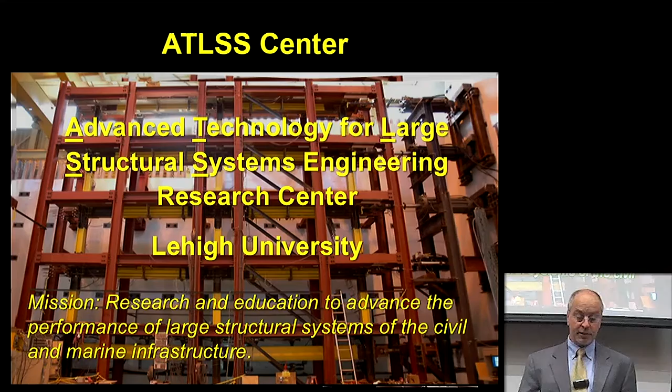One of our main features is our laboratory, similar in size to the Newmarket laboratory here, probably a little bit smaller. It's been there for about 30 years, and we have a lot of equipment and a very talented staff. What makes it special, I think, is our ability to do lots of large-scale tests.

For example, this right here is about half the width of the Bronx-Whitestone Bridge in New York City, about half the width of the actual bridge, in our laboratory at full scale. So that's the kind of thing we typically pride ourselves on.

Here's a summary or introduction of the talk. I think there's quite a bit of experience and knowledge about self-centering systems here, so I'm not going to spend too much time on the motivation. I have a few slides about that. I'll talk about some work we did on steel systems, and then talk about really what to do about the higher mode response, including how to quantify it and how to engineer for it.

So let's talk a little bit about the motivation. In the US, and I think it's fairly similar around the world these days, we design for something we call life safety, which is actually a little difficult to define. We design for something called a design basis earthquake, which is roughly a 500-year return period ground motion. We don't explicitly design for immediate occupancy under more frequent earthquakes, or collapse under maximum considered earthquake, but we expect to get that kind of performance by designing in this way.

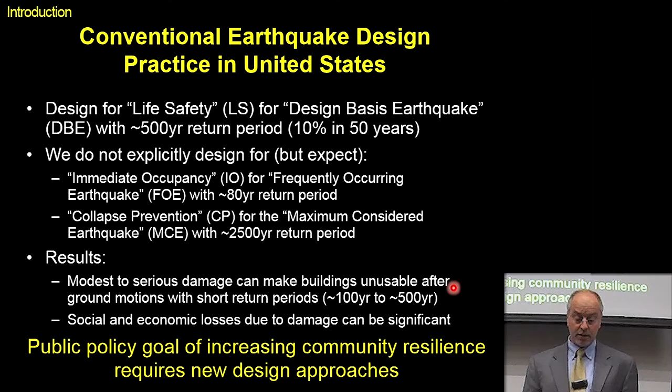One of the results, which I think the Christchurch experience bears out as well, is that we can expect a lot of damage to occur under ground motions that are fairly intense, but not necessarily the maximum considered ground motion. That can have serious economic and social consequences. So in the US there's a push to think about this differently, as I'm sure there are in places with other recent earthquake experiences. We need to think about how we can get to this low-damage condition in a reasonable way. That's really the main topic for today.

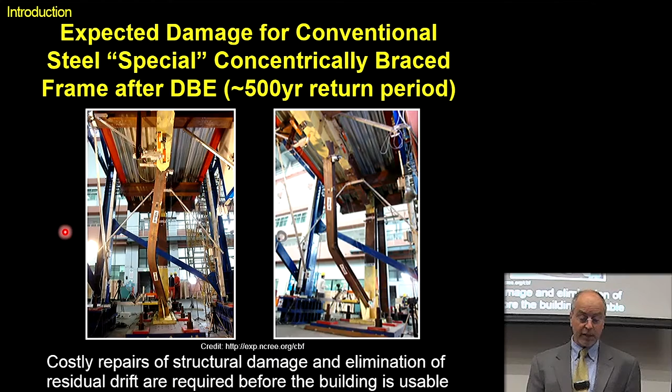So if we think about self-centering systems, we really want to think about doing this in a different way. These are some points, I think the main points, and I have a few more on the other slide about what we're trying to achieve and why we're doing it this way.

The first thing we want to do is eliminate damage to the main structural members, and yet we know the structure still needs to be deformed.

It's always possible to design a structure to be linear elastic. In fact, one building that went through the Northridge earthquake, the Sylmar Hospital building, was almost linear elastic, and it had accelerations at the roof of about 2.5 G. So everything else in the building got damaged, although the structure wasn't damaged.

So there are different ways to make the structure undamaged, but typically we need to provide some kind of softening mechanism. We'd like to do that without having damage to the main structural members, and so we do that with some kind of post-tensioning.

Here's an example of a beam column joint, and here's a rocking steel braced frame. The post-tensioning closes those joints, which open up under the earthquake loading, and we avoid any permanent lateral drift.

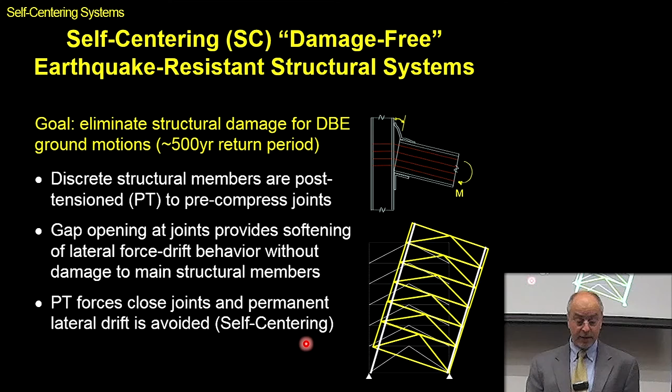I don't think this idea is necessarily new in New Zealand or to this audience. Some of the early work we did goes back to the mid-1990s in the so-called PRESSS program, the Precast Seismic Structural System program. In the US, it wasn't possible to build precast construction in a seismic zone before this work was done, and even today there are still some challenges in getting permission from the building authorities to do that.

In that program, the work we did at Lehigh was to study walls and frame systems. For the wall systems, we were able to show that you can get pretty large drift capacity, in this case 3.5% drift, with essentially no damage or very little damage to the wall. That opened up the possibility of surviving the design basis earthquake with essentially little or no structural damage.

Another thing we learned very early on in this work was that we get a lot of deformation capacity without really depending too much on material ductility. Here was a wall that went to 6% drift that we couldn't fail. You see it always self-centered as well, but it was impossible to fail within the laboratory capabilities we had. We had 3 cycles at 6% drift, and that was really without exhausting the material ductility. That's the kind of thing we learned at that point in time.

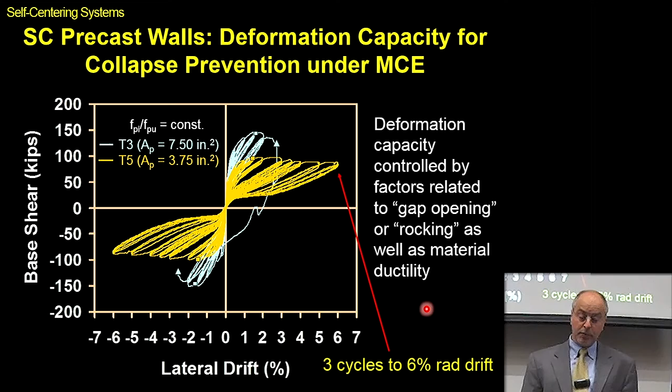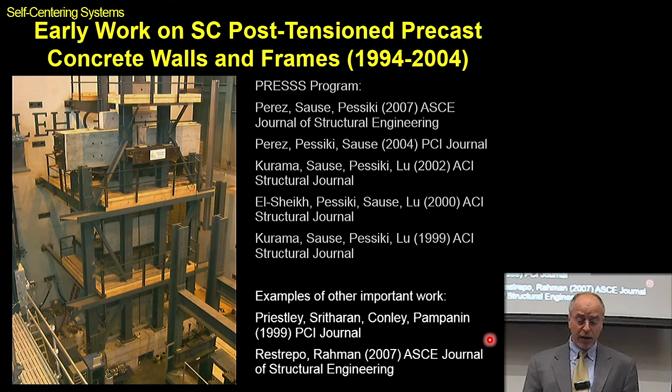Of course, there was a lot of other work done, and here are two examples. Some work at UCSD on their shake table—sorry, not a shake table, in their large lab it was a pseudo-dynamic test, which you can find in the PCI journal. Also some work by Restrepo and Rahman on a hybrid wall system. So other important work was done in this area.

There are some challenges to that system, so we haven't really done too much with it going forward. I'll show you a video in a minute or two of some experimental work we did, but we kind of let this go for the time being.

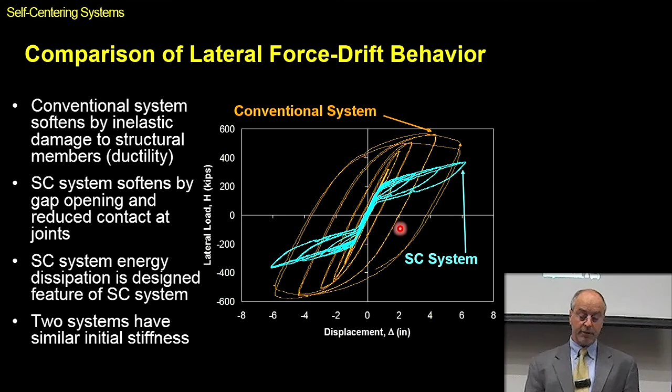What we learned from that is that energy dissipation is really a designable, or engineered, feature of the system. When I was a graduate student, a PhD student, we were taught that this kind of large hysteretic response was highly desirable—that was the goal—and our professors would get pretty excited when they saw that in the laboratory. I look at it now and I just see damage: buckling, yielding, rebar yielding, cracking of concrete. So what we found is that if you want that energy dissipation, you can do something else and fatten this hysteresis loop out, or make it skinny, or whatever you prefer. You can make it self-centered. You can get the same initial stiffness without doing anything extraordinary. Those are the kinds of things we learned from that work.

So about the mid-2000s at Lehigh, we proposed to do something called damage-free steel frame systems, and I think we did this as a collaboration with some people at Purdue and Princeton.

And I was the only one of the people who thought that we should use the word damage-free in the title of our proposal. Everyone else thought it would be the kiss of death, that we have no chance of getting it funded. And so we did it anyhow. We put this in the proposal, and I don't think we thought we would get there. But in fact, we did.

And that's what I'll show you with the next maybe 6 or 10 slides or so. I'm going to show you first the MRF, and I'm sort of downplaying the MRF because at the end we found that this is not perhaps the best system for us to go forward with.

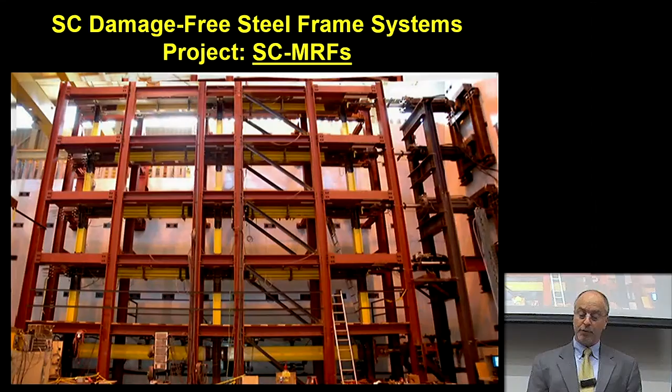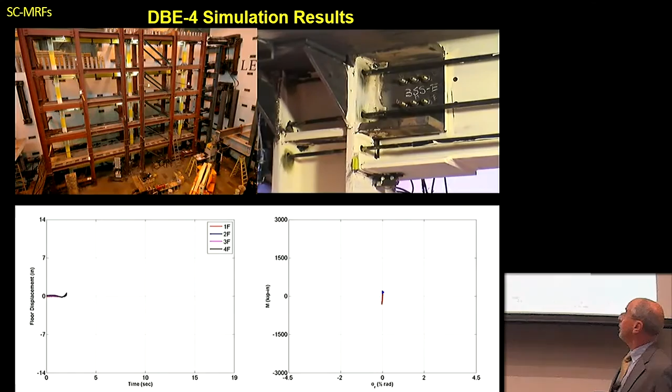But the yellow frame in here is a 4-story moment frame, and what you can see here is a video which shows how it behaves. This is what we call a slow hybrid simulation. It's very slow, which means it's a time-lapse video, and the test took about half a day to do. And what we can see is the gap opening response in the moment connections and the nice flag-shaped hysteresis loops that people have come to expect.

And at the end, we'll see that the roof drifts or the floor drifts come to basically zero, and the building is fully plumb afterwards. We use a little friction device in here on the web to dissipate the energy, and that's what gave us the width of these hysteresis loops.

But at the end, we found that this is very difficult to make work with a reasonable floor system. We actually had a floor system in this two-bay frame that simulated that response, and we showed that we could make it work, but it really wasn't very practical. So we've moved on, although they are built in the U.S. in precast concrete these days. Although I don't really understand how they deal with the floor system issue there - I don't think they do it very well.

Our main focus here is on these rocking steel frames. And this is a concentrically braced frame. You can see the orange bracing here. So I get the pointer back.

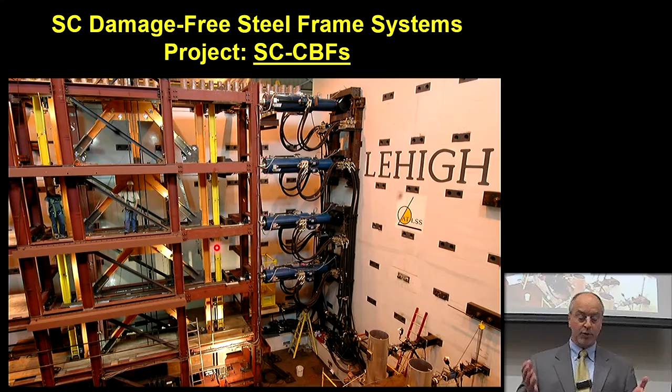And these are our reduced scale undergraduate students here working in the laboratory. It's about 60% scale. The yellow columns are what I'll call gravity columns, which actually don't rock or uplift, and the orange columns in here are the columns that will.

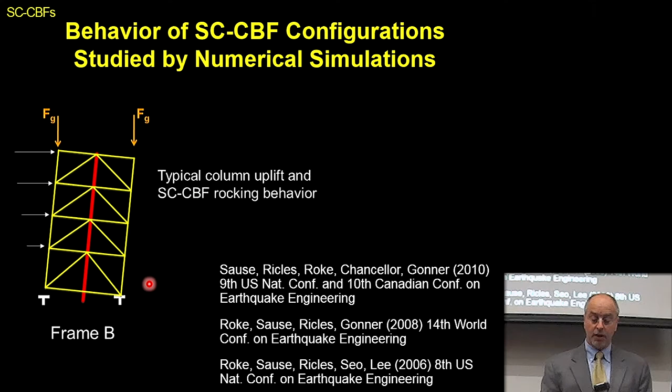And what we did early on in this - we started this work around 2005 or 2006 - we worked numerically on different kinds of systems that would rock and try to find the appropriate or ideal system for us to work with in the laboratory. This is an example frame B, and ultimately we came up with something which we called frame D along that series of A through D.

And it had columns which don't uplift, which we call gravity columns. It has concentrically braced frame columns which do uplift. And we thought the relative motion between those columns was an opportunity to dissipate some energy. With a little more study, we decided that we would use friction devices in that area. And so this is ultimately what we did in the laboratory.

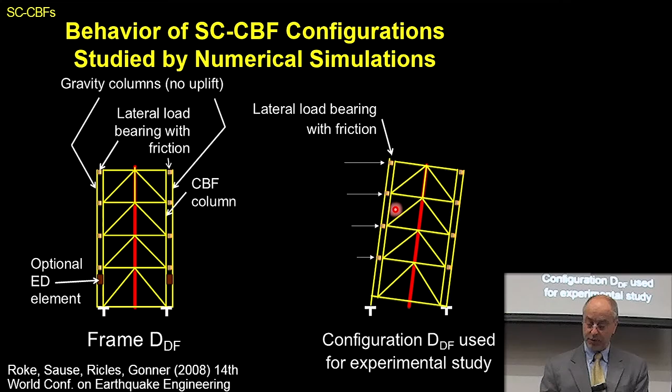This particular system is discussed in this paper from the World Conference. We have post-tensioning, which pulls the structure back down as it rocks and gives us some self-centering response. And as I said, all the energy dissipation is through these friction bearings, which this next slide shows in a little more detail. There's the gravity column, which doesn't uplift, and there's the concentrically braced frame column, which does uplift. And there's a bearing with a knuckle - hardened steel on a piece of brass in this case.

And the way that force develops there is we have the floor system, which has the lateral forces in it, and the floor system pushes on the gravity column, and the gravity column then pushes on this bearing. And there's a cutout within the floor system which permits that rocking to occur freely.

So in these self-centering rocking systems, we try to consider these two performance objectives, and I'm going to ultimately focus on the first one much more than the second one. That's damage-free with potential for immediate occupancy under the design basis earthquake. The main thing we want to do there is control the yielding limit states, really deciding when those limit states will occur and control, let's say, their sequence and the intensity of earthquake under which they occur. And collapse prevention - we actually show later on that we can get that.

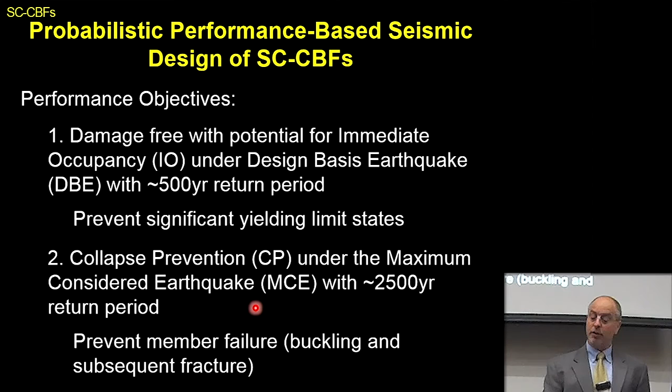I don't know if I have the slides in this talk, but I have some slides that show we get good collapse prevention performance relative to conventional systems, but that's not really where I'm going to focus so much today.

First is to think about the limit states of this rocking system. The first limit state is actually rocking, and there's some range of behavior under which it won't rock, and that could be reserved for example for wind loading or moderate earthquakes where we really don't want to initiate that nonlinear action. There's column decompression or uplift of this column here. Ultimately, some yielding of the PT steel. We use PT bars here, and we're not adverse to having those bars yield, although sometimes if you use strands there's some concerns. And then later on, with more drift and higher intensity earthquakes, we can expect yielding or buckling of the members and maybe fracture and failure as well.

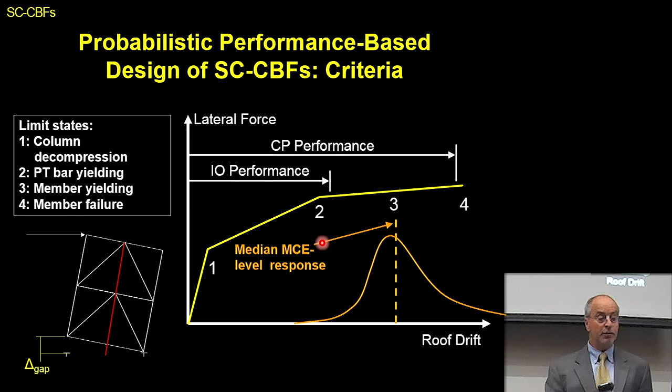So thinking about where we want those limit states to occur, there's a median level DBE response, and we want that to be perhaps around when the PT yielding occurs, maybe a little below. We recognize that there's some uncertainty in how much that demand will be, and we consider that a little bit later on. And then for the median MCE response, we think about this around maybe when the members begin to yield or buckle somewhere out there.

I won't spend a lot of time talking about this prototype structure. It's 4 stories, it's designed for a site in California, and we have, of course, some tributary seismic mass associated with each one of the brace frames.

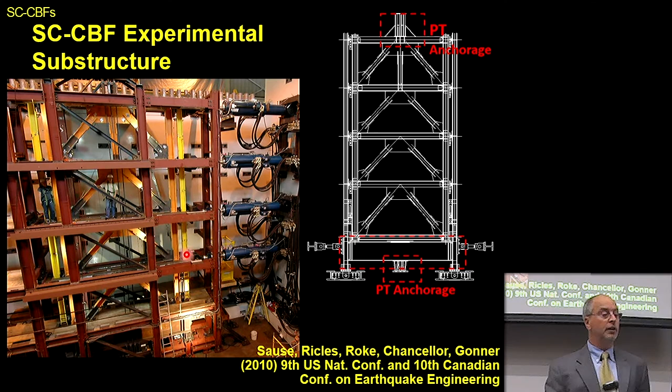I really want to focus more on what we did in the laboratory on this. So here's what it looked like in the laboratory. There's our PT anchorage in the roof level and down in the basement. These yellow columns are going to stay anchored, they're not going to uplift, and the orange columns will, and there's a friction bearing in between there to take advantage of that relative motion.

So in the hybrid simulations, these are all laboratory simulations, they're all slow, so no real-time stuff here. We did a large number of them, I'll mention in a minute, 31 simulations ultimately. Before that, we tried to get our bearings in terms of how intense the earthquakes needed to be. We did numerical response statistics for 30 ground motions, and you have like a mean value of the drift, about 0.9% for the DBE and about 1.5% for the maximum considered earthquake.

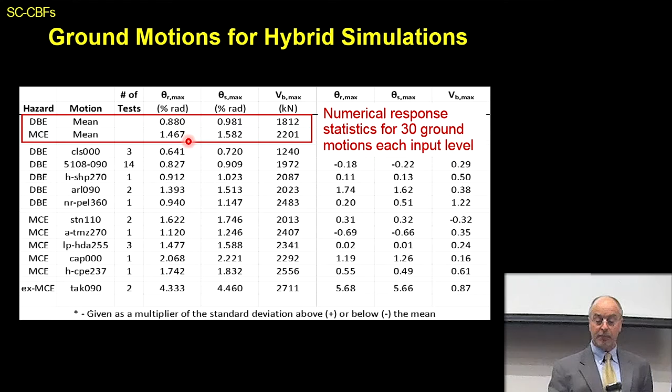And as I mentioned, we did 31 simulations in the laboratory with the same structure. There aren't many structures, I think, that could survive 31 earthquake simulations at the design basis earthquake or the maximum considered earthquake. And I'll show you at the end that this structure performed really quite well.

I'm going to show you two different ones from the set. One is this Arleta ground motion from the Northridge earthquake, and one is from Takatori from the Kobe, the 1995 Kobe earthquake. First, I'll show Arleta, and these are multiples of the standard deviation of the drift. So we're about 1.5% drift or 1.4% drift, and about 1.5 to 2 standard deviations above the mean. And here's the response that we would see.

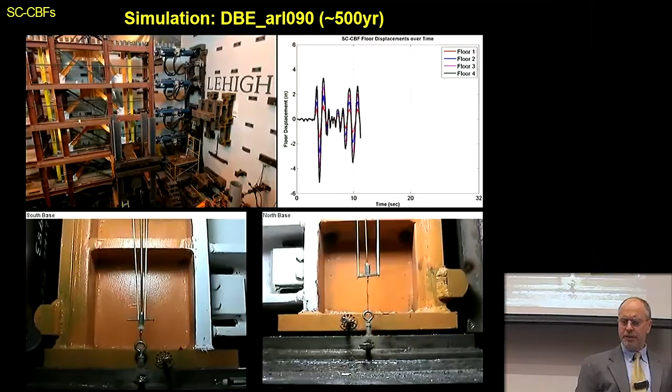This is again split screen showing the uplift of the columns and the lateral drift. This is about 60% scale, as I mentioned before, and so we're seeing perhaps 100 millimeters of uplift, or maybe not quite that much. That's it, that's a typical DBE response.

Of course, we get the self-centering behavior because the PT pulls it back. The PT remains linear elastic. We get flag-shaped hysteresis loops that we're expecting. There's really nothing very spectacular about it, and I guess that's what you want. If you're looking for damage-free response under the design earthquake, you really want nothing to happen. So that's essentially what happened, nothing.

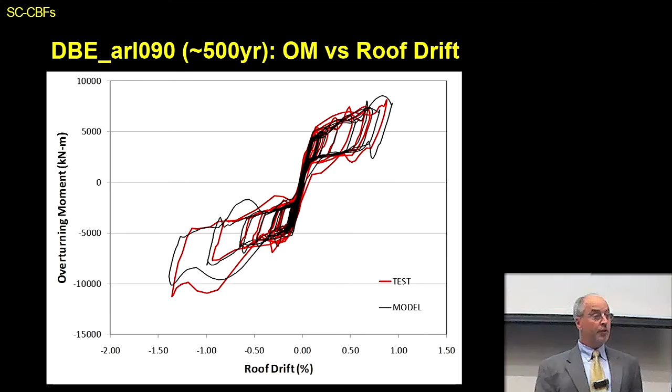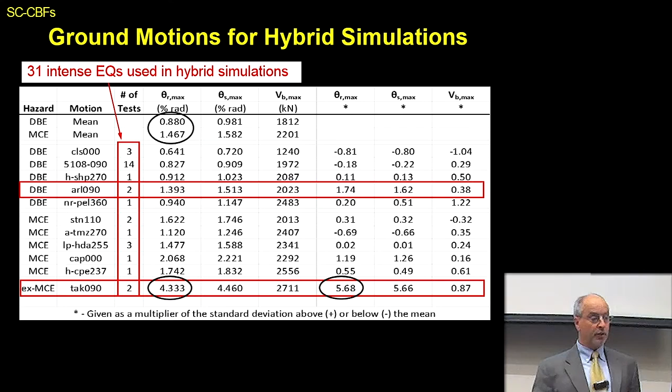So the other hybrid simulation I want to show you is the Takatori record. This is a record which is specifically intense for this structure, as I'll show you a little bit later. It produces a drift of around 4%, which is 5 standard deviations above the mean. So it really is an extreme case, and we labeled it extreme MCE for this particular structure.

And here's a video, and I'll probably play this twice because I think it's pretty interesting. Again, this is 60% scale. I guess we're seeing about maybe 200 millimeters of uplift or something, almost equivalent to the dimension of the column. And I'm going to play that one again because I find it entertaining myself.

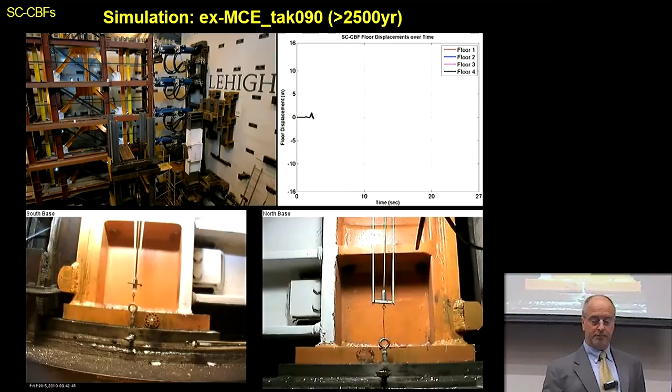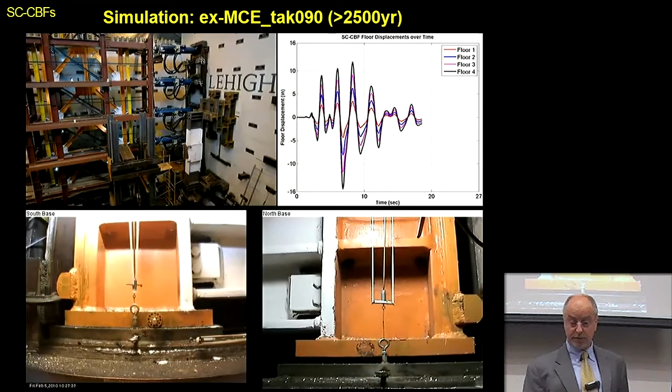So again, this is actually time-lapse video, and this is a slow hybrid simulation, so some of the dynamic effects might not be included. We can talk about that perhaps later.

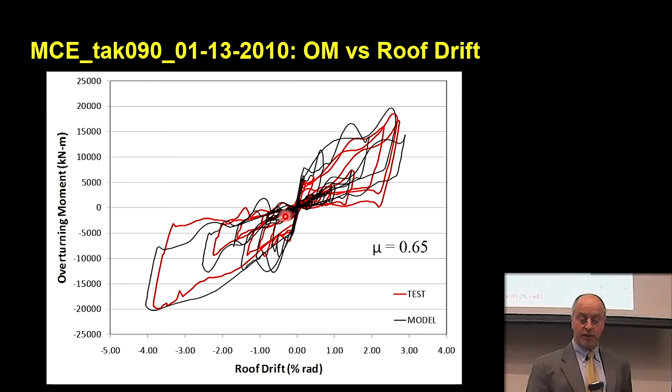The roof drift still self-centers, and we have something that looks flag-shaped in terms of the hysteresis loops. They start out flag-shaped, and then eventually, as I'll show you in a minute, we lose the post-tensioning, and so they become sort of very linear through zero.

Here's the reason that record produces so much drift. We have a period of around 0.65 seconds or so, and the period elongates into this large area of energy within the spectra. So we're actually responding to all this energy out here in the 1 to 1.5 second range, and it turns out to be a bad ground motion for that particular structure.

This is the PT response, and as I mentioned, we use PT bars, Dywidag bars, in these cases. We can see the initial PT bar force, then some increases in force, and eventually we've yielded the bars so extensively that we lose all the PT force. Then the PT force picks up again as the structure continues to rock, and eventually, at the end, we end up with no force.

I don't have time to talk about that right now, but if there are questions later, we're not so concerned about that kind of behavior. It's not something we want to happen under the design earthquake, but we don't think it represents a collapse potential for the maximum considered earthquake.

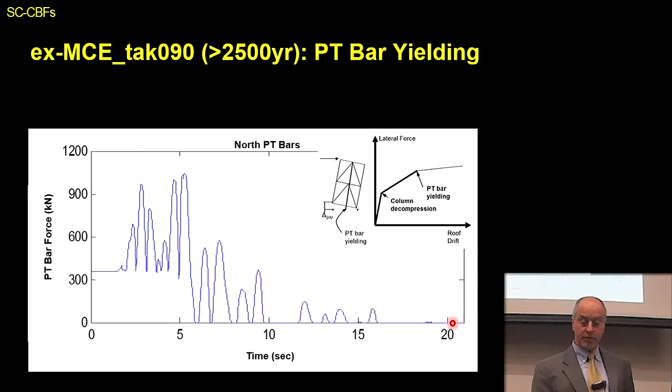So there's the frame after our test, 31 records, DBE and MCE response, and no damage to the brace frame at all. That's really the kind of findings we have: no damage under any DBE, essentially no damage under MCE.

We did some damage to the load bearings because they had both large deformation responses and large forces on them simultaneously. The PT bars yielded, but still performed well under even a post-MCE aftershock, which we tested in the laboratory. We also found that restressing the bars could return the structure back to its initial state. We never replaced the bars.

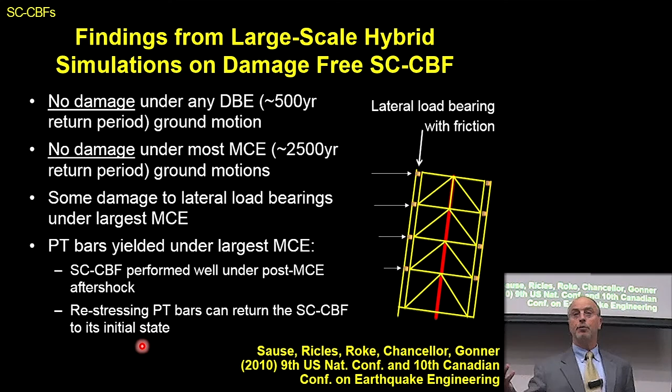We did 31 records, and the bars yielded sometimes, but we never actually replaced them. We just restressed them. So now I want to talk a little bit about design.

I think some of these ideas are generally useful for self-centering rocking systems, but I'm going to focus on the SC CBF because that's where we have our experience base, though I imagine some ideas would also work for other systems. As I mentioned earlier, we have two performance objectives: damage-free under the design earthquake, and collapse prevention under the MCE. I'm going to focus really on the first one.

As I mentioned earlier, we find that we get the collapse prevention objective without really putting a lot of effort into it, and really the first one, damage-free performance, is the challenge. I'll focus again on application to self-centering concentrically braced frame buildings.

To get that damage-free performance, we actually have two issues to address. One is when the PT bars, or the PT steel, will yield, and that's essentially what I would call a first mode response, the dominant mode, dominant response. I think most shear wall structures, or structures that can develop a flexural mechanism, have the same characteristic, that's really a first mode response.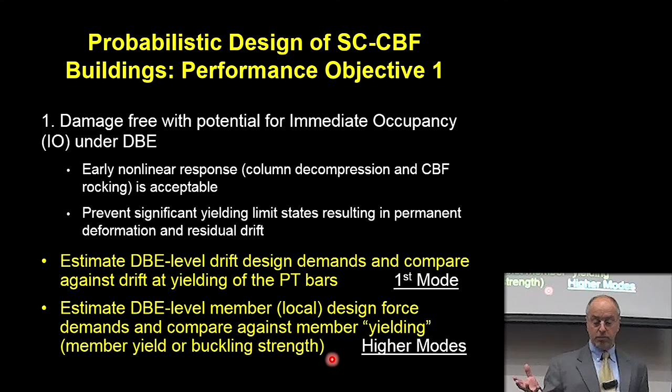But the local design forces, the things we have to engineer for to keep the members from yielding or buckling, is actually a higher mode issue. So they're really two separate issues, and I'm going to address them separately. The first one is really focusing on the PT yielding.

In these performance objectives, we think a lot about what the consequences are. The consequences of minor PT yielding are small: it's concentrated damage, we know where to find it, it's in the PT steel. If we have to replace the PT steel, it's all in one place. If we don't have to replace it, we can just restress it, a fairly straightforward operation. So the consequences of PT yielding, we think, are relatively small.

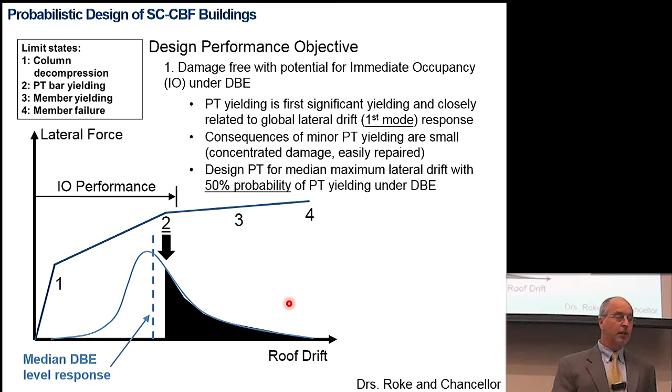So we have proposed to design the PT for a 50% probability of PT yielding under the DBE. We find that even when it yields, it doesn't yield much, and we don't necessarily lose a lot of the pre-stress. In the Takatori record, we lost it all, but that's an unusual response. So that's kind of the idea.

We're going to design for this median response. And really, to get there, it's not that difficult. First, we have to make an estimate of our DBE level drift. We do that by having some idea of the drift at decompression, this first instance of nonlinearity, using some kind of ductility factor, project forward, and come up with an estimate of the DBE response. We found that we actually get pretty good estimates this way, and it's not that difficult to make a good estimate of the drift demand under the DBE for this system.

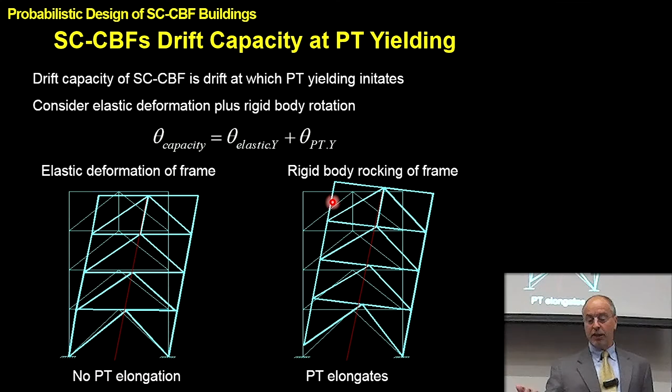As far as the capacity, we recognize there's two kinds of deformation capacities. There's an elastic capacity that's present without the rocking behavior, and then there's another part which is due to rigid body rocking of the frame. If you have enough rigid body rocking, eventually you'll yield the PT, so it's not that hard to figure out when PT yields under the rocking action.

So here's a quick example of how we handle that. I don't think it's that challenging to understand how to do it. Sometimes the detailed calculations might be challenging, but the concepts are pretty straightforward.

And we have quite a bit of experience with the performance of structures that are designed this way from numerical simulations, and this gives us pretty good response.

Now, the more challenging one is how to design the members for a low probability of yielding, considering the higher mode force response. There's a couple points here which are important. One is the force response is not controlled by first mode rocking. So all the forces in the braces and the columns, all the things that we're concerned about, trying to keep them from yielding and buckling, are not really a first mode response. They're a higher mode response.

The consequences are potentially serious because it's distributed all over the frame. So if you buckle some braces in a multi-story frame, you have many repair actions to take. So we want to have a fairly low probability of that occurring. And I think maybe foolishly, we selected a very low probability, 5 to 10%, which means that we ended up designing for very high forces. But that's the kind of design that you saw in the tests that we showed earlier, that very low probability of member yielding and buckling under the DBE.

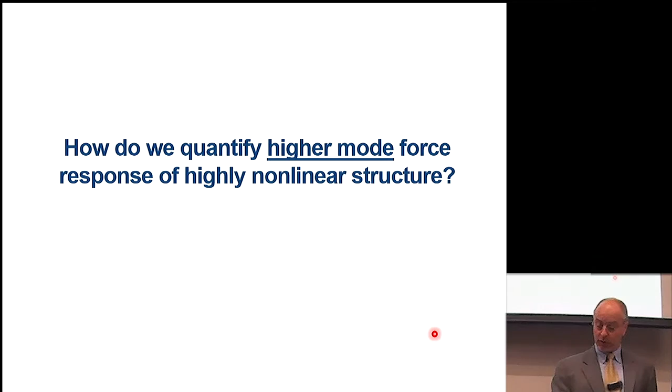So we're actually trying to find forces which are way out here in the tail of the possible member force response. And this led us, and this is really a question we asked ourselves a bunch of years ago, how do we quantify the higher mode force response if we want to somehow control it? And we came across this idea of effective pseudo-acceleration, and it's in the papers, it's kind of a footnote in the papers, but I wanted to spend a little more time today to talk about that because we found recently that this was a much more generally useful device, tool, way to quantify higher mode response.

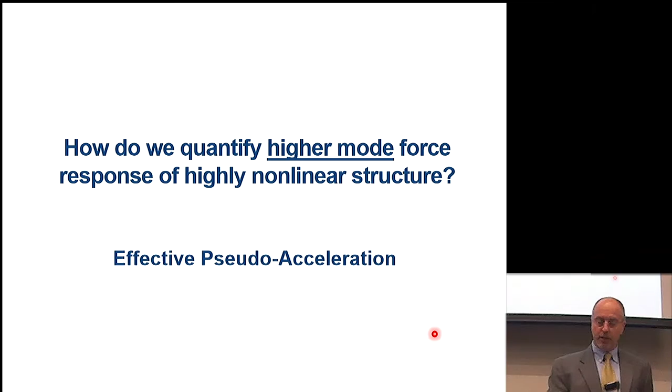And so we've used it in a number of different ways recently. This is a little bit of a review of some of the ideas related to pseudo-acceleration. And it's so natural for us as earthquake engineers to use this quantity. I think sometimes it's not always clear exactly what we're doing. We're just kind of using it in the way we always have.

And so we think that we have an equation of motion for a multi-degree of freedom structure. We know we have a restoring force. Often people write that as K times displacement, but I want to generalize it for nonlinear structures, so I just write it as the restoring force. In linear dynamics, we think of the restoring force as being a summation of something called S, and this is from Chopra's book. These are static forces multiplied by a pseudo-acceleration response, which is time varying. Really, we can write the response of any force response in the structure in terms of static quantity times the pseudo-acceleration. And typically, in our practice, we're getting the pseudo-acceleration from single-degree of freedom systems. We're calculating that, and we're going in this way. We're calculating this restoring force from that.

And for design, we can use the peak pseudo-acceleration to basically estimate any response, mode by mode. And then we, of course, have to have some mode combination approach, which we'll leave till later. We'll get to that in a little bit.

So what we're doing here is we're using the same idea for nonlinear structures. And of course, we can't do the forward approach I just showed. We can't go from pseudo-acceleration towards restoring force. We actually have to think about it in an inverse way. And that's how we ultimately can understand how to quantify the nonlinear response.

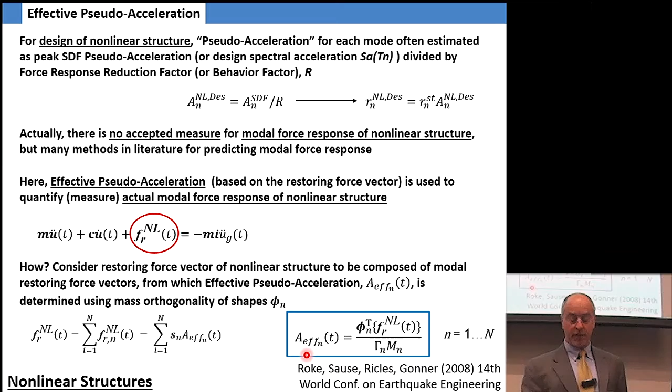So this pseudo-acceleration quantity here we call the effective pseudo-acceleration, and that's actually the thing you could use to quantify the response in each mode for a nonlinear structure without introducing any errors or any approximations. All it requires is the mass orthogonality of the modes.

And that's what this shows here. So we use this equation, but essentially we're solving it inversely, and we're using that as the effective pseudo-acceleration to quantify the response. Another way to think about it is you can think of the restoring forces consisting of some vectors multiplied by some unknown quantities, which we solve for. And these are sort of well-known force quantities here.

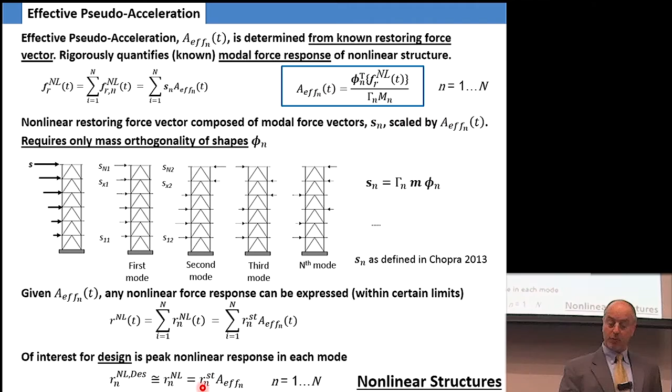So of interest for us is actually the nonlinear response we might use in design. And we're going to say that's a static response multiplied by some peak effective pseudo-acceleration for a nonlinear structure. So I'm going to give you a couple examples to show you what we can do with this quantity and how it can be compared against other kinds of pseudo-acceleration type quantities.

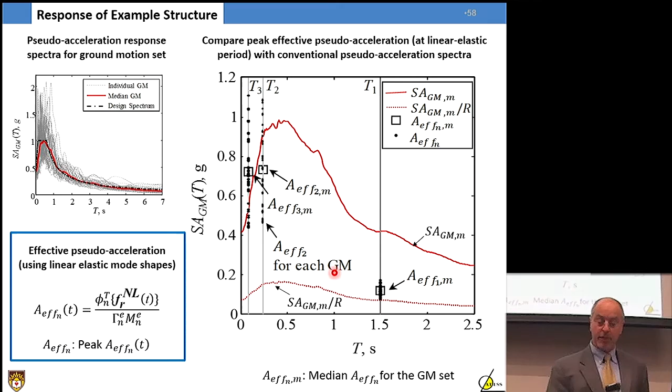So we're almost seeing the first mode being controlled by the plastic hinge at the base of the structure, but not exactly. But that's a pretty clear evidence of how the first mode is controlled by the yielding mechanism, how the higher modes are not. In fact, we see a tremendous amount of scatter there.

And we can take the same approach and look at structures which are different numbers of stories, 4 stories, 12 stories, structures designed with low R values, so almost elastic designs, or structures designed with high R values. We basically always see the same trend, that the higher modes are typically essentially linear elastic, and the first mode is being controlled by the plastic hinge forming at the base. Again, I don't think any of this is particularly new, but it's just a different way of showing it, perhaps, a more clear way of showing it.

Now, we also can do this with other mode shapes, and we call these alternate mode shapes. This concept was used by Sullivan et al. in 2008 in a paper they wrote, and they called them transitory inelastic mode shapes. But these are basically shapes which are centered around a certain yielding mechanism. In this case, for this particular simple structure, it's a plastic hinge forming at the base of the structure. So we can make mode shapes based on that, as opposed to the elastic mode shapes.

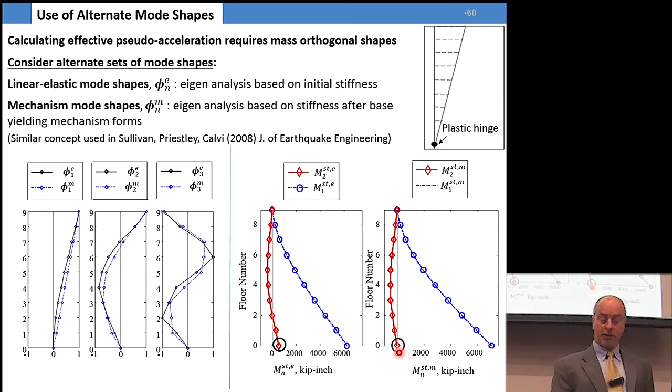We get a little more clear picture of what's happening in the structure. So here's a plot comparing the mode shapes: elastic mode shapes in black, and these so-called mechanism mode shapes in blue, based fundamentally on this being our first mode. The mode shapes are quite similar to each other in shape, but these mechanism mode shapes have a very interesting characteristic in that at the base, they have no moment—they produce no static moment. So this mode shape is such that, if I use it as my fundamental basis, I have one mode shape directly tied to the plastic hinge at the base of the structure, and all the other mode shapes are completely independent of that plastic hinge. That allows me to get a much more clear picture, using this effective pseudo-acceleration, of how the yielding at the base of the structure controls the response.

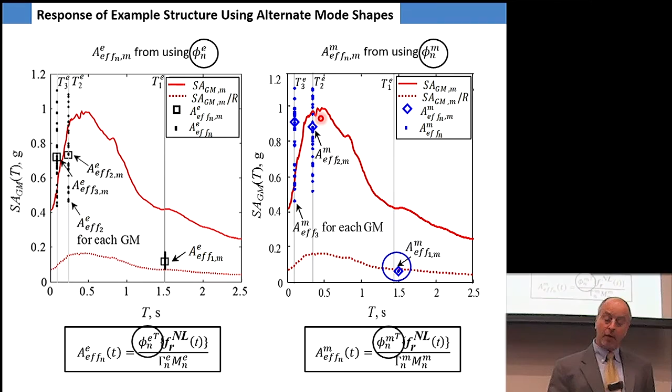So this is the idea we want to use: this effective pseudo-acceleration, now to figure out how to design our SC CBF for the higher mode response. That will be the term we use to quantify the higher mode response.

Come back to our problem: how do we get these low probability of exceedance member forces for design? We're going to contrast this with a conventional response spectrum analysis, at least how we do it in the US, when designing a building according to code using response spectrum analysis. As is typical around the world, we typically divide the entire spectrum by R, which means our higher modes are being designed as if they had been controlled somehow by the nonlinear mechanism that was forming. I just showed you that, in fact, that's not true.

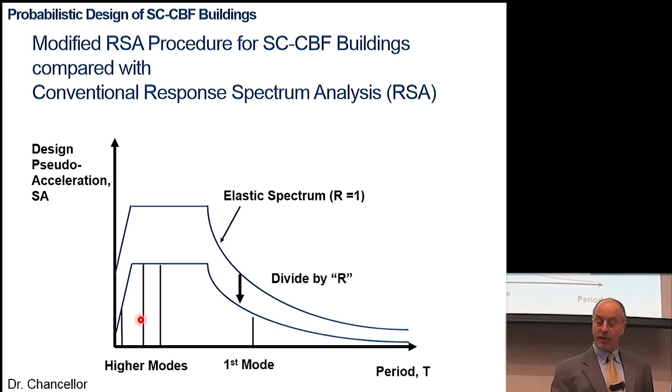Here are the higher modes that we would design for in that case. For the kind of response spectrum analysis we're proposing for these self-centering concentrically braced frames, we do reduce the first mode based on the yielding capacity of our base mechanism, our rocking mechanism. But for the higher modes, we end up scaling them up. This gives us really good performance, but also creates, I think, some expense that we want to be paying attention to as well.

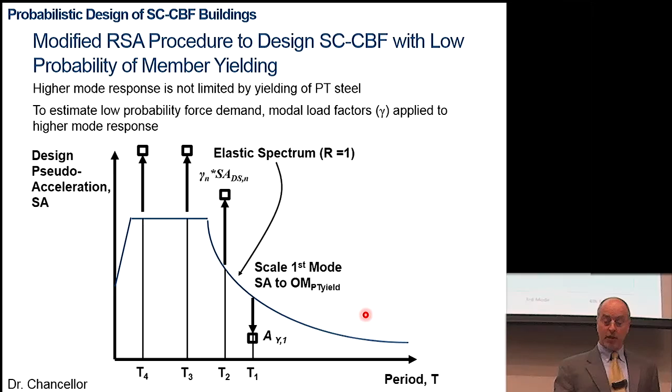So here's the simple answer to that question. If you want to design so the members don't yield or buckle, with only 5% probability of yielding or buckling in a design earthquake, you have to take your design spectrum and scale it up by 1.6, not divide by R.

You have to go up instead of down, and that, of course, leads to some pretty big design forces. So this is what we did, and that's how we got the performance that you saw in our test results. Here's a summary of that.

You take your first mode pseudo-acceleration, you actually scale it down based on the PT yielding capacity. You take that and perhaps scale it up a little bit to give us some margin against the first mode response. Use an unreduced pseudo-acceleration design spectrum, and you scale that up by 1.6 to get the capacity we want.

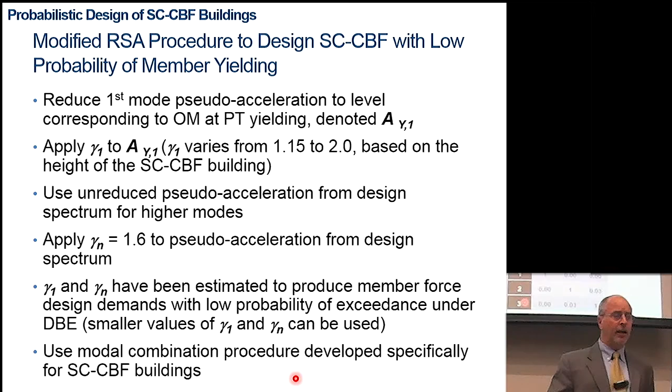Use a modal combination procedure developed specifically for these buildings. So one of the things I didn't talk about was modal combination procedure in design, and I'm going to only have a couple slides to talk about that. One of the things we were able to do with the effective pseudo-acceleration in a very useful way was actually study the correlation between modal responses.

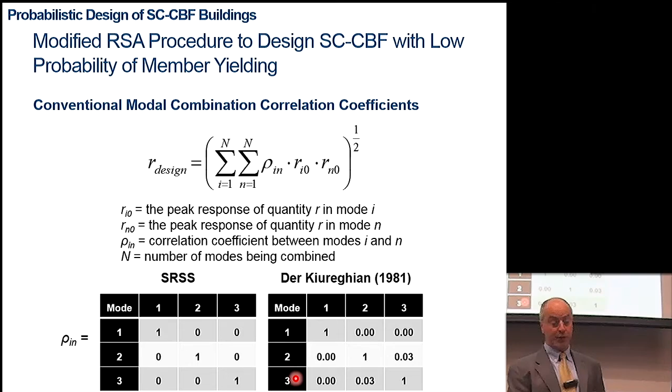Here are the classical results: the SRSS that people use, or CQC, based on some work that Der Kiureghian did based on random vibrations of linear elastic structures. And we found that none of that was particularly useful. The correlation between the first mode and the higher modes actually varies depending on what response quantity you care about—braces versus columns are quite different.

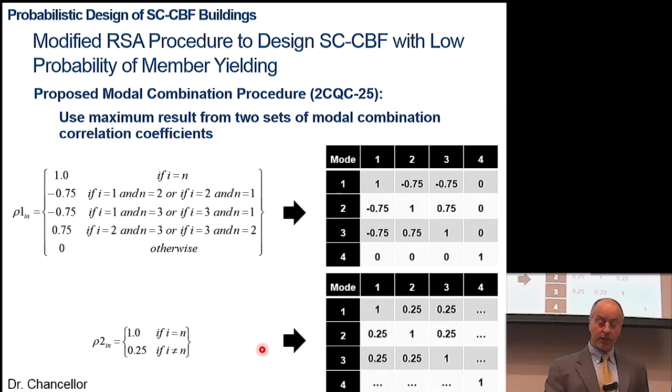But if you use the effective pseudo-acceleration and look carefully at the correlations among the modes at the times of these peak responses, you can observe it. So Brent Chancellor tried to boil that all down to something quite simple. He found that if you use 2 sets of correlation coefficients, you could get a pretty good bound on the kind of forces you might get in the members. Here's a summary of that.

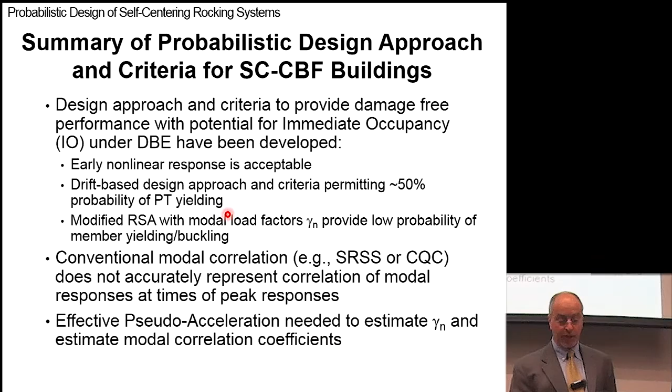This is really just our design approach: we allow that PT yielding to occur, it's really a drift-based approach. We use a modified RSA with load factors to get a low probability of member yielding, and we have to develop a special modal correlation approach to get the right result at the end. We need the effective pseudo-acceleration both to estimate those load factors, gamma, and also to get the modal combinations.

So the cost of this performance I really wouldn't try to quantify, but you get some strange results I'll explain later with another figure. The column sizes in these concentrically braced frames, as we tried to design them up to 18 stories, became really large, because the member design demands are really large. This whole idea of designing for a very low probability of response in these higher modes with these gamma factors led to extremely large design forces and then large members coming out of that.

That caused us to think about this in a little different way. We could see that we had done a good job of controlling the first mode response by rocking, but we really had uncontrolled higher mode response. And as the earthquakes got bigger, the ground motions got bigger, the higher mode response got bigger. So this is a good example of what you get from that.

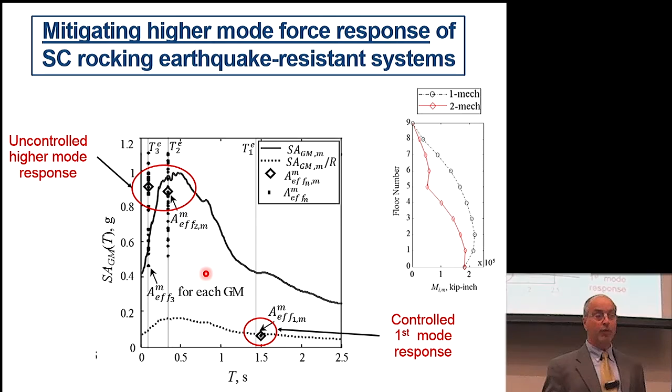So we'd like to mitigate that somehow, and we started looking at some different approaches. I have 2 approaches. One is really focused mainly on how to control the second mode alone through adding a second yielding or rocking mechanism.

This idea has been developed already by others, Panagiotou and Restrepo and Wiebe and Christopoulos. So there's that idea, and then I have another idea I'll present a little bit later on, which is heading in a different direction than this.

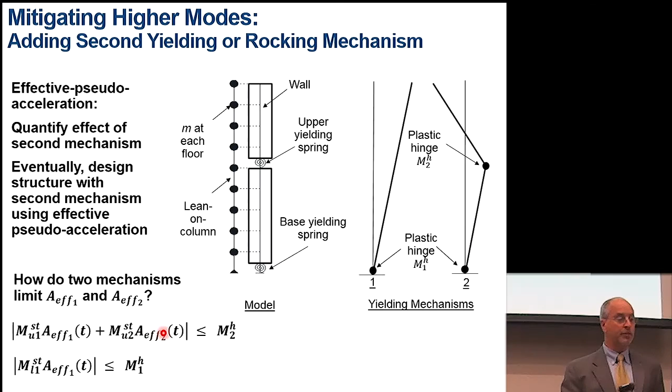By using the effective pseudo-acceleration, we're able to do things with this approach that others were not able to do so far. That is, to make a direct correlation between the response in the first and second mode and the strength of these plastic hinges or rocking joints. We directly relate them to the first and second mode responses with some equations here. I won't go into the details of that.

So by doing that, we're actually able to provide a predictable reduction in the effective pseudo-acceleration for the second mode. We could say, well, here's where the second mode response will be if we design that second hinge to have a certain strength, putting it right down to a specific value. Also recognizing that, of course, we're getting the same first mode control that we're getting previously.

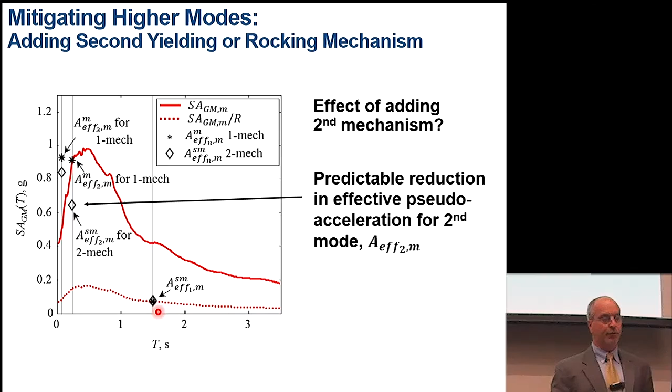So this is a tool to get the second mode to be as well controlled as the first mode with a second hinge. We're able to create some bounds or envelopes on what the first and second mode response together could be, bounding that combined response either in terms of shear or moment up the height of the structure, as shown here.

So if we know the peak effective pseudo-accelerations, we can actually get a perfect bound. The same is true for the shear up the height of the structure.

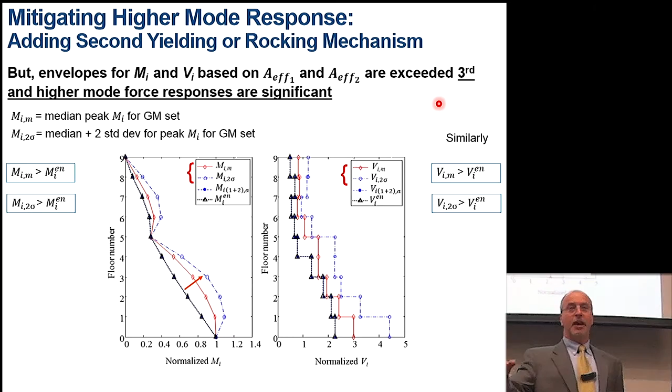First we're controlling the first mode with rocking, great. Now we can control the second mode by introducing a second mechanism, great. Now the third mode is there. And of course, as the structures get taller, these higher modes will continue to be an issue.

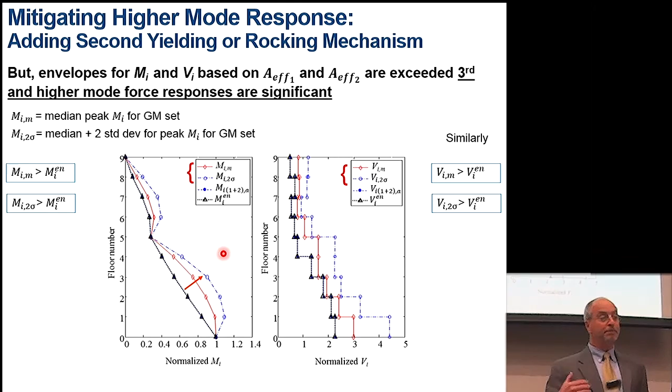So I think if we can bound that, we can come up with a way to say, well, here's the maximum force we have to design for. And we certainly can see that we've pulled this in a little bit compared to what it would be without this second mechanism. But really, at the end of the day, we've taken it one step at a time. It's really a work in progress, but we have ways to estimate that upper bound response in terms of moment or shear, and we've developed some better methods for that.

But it's really a work in progress, and at the end, I don't know that we're actually going to eliminate the problem of having to design for fairly large forces in order to get the performance that I showed you earlier. So one of the ways then to deal with these higher mode forces is to try to mitigate them by adding a second mechanism.

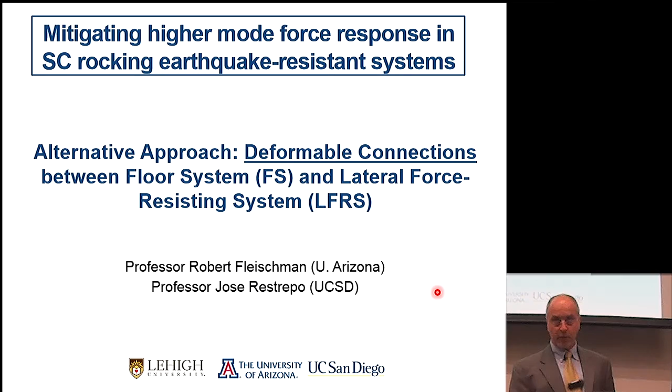The alternate approach is the use of some deformable connections between the floor system and the lateral force resisting system. This is collaborative work that we're doing with Jose Restrepo and Robert Fleischman at the University of Arizona and UCSD, as I show here. This was actually presented last year at the New Zealand Society of Earthquake Engineering annual meeting by my PhD student, Georgios Tsampras. So we'll show you a few slides from that talk, and then that'll be the conclusion for the talk.

So, for a conventional structural earthquake resistance system, we think we have basically 3 parts to that: a gravity load system, including some framing and whatnot, a floor system, and a lateral force resisting system.

We assume that the floor system is essentially rigidly connected to the lateral force resisting system, and that's our conventional way of thinking about this. For this alternate approach, we put some cutouts in the floor system, and we try to create some separation between the floor and the lateral force resisting system.

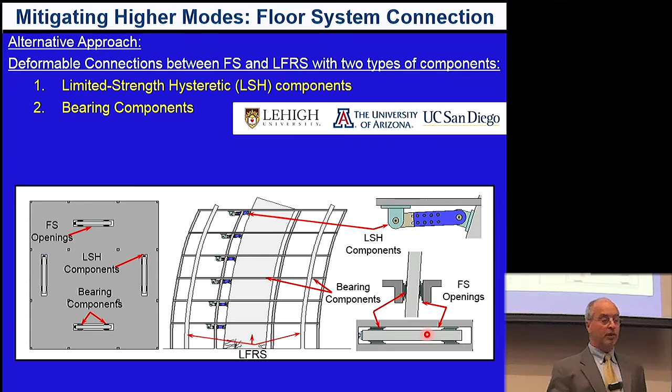We add a limited strength hysteretic component. In this case, it's shown as a friction device, which transfers the force into the lateral force resisting system. We also add some bearing components, which brace the lateral force resisting system in the out-of-plane direction. That would be the total combined system.

The goals are to limit the force that we transfer to the lateral force resisting system and reduce the accelerations and responses. This approach is remarkably effective. I don't know how practical it is in terms of construction, but it's remarkably effective, as I'll show you.

It actually solves some of the problems of rocking structures in the sense of how to handle the upward motion and things like that. But I think it also poses a lot of practical challenges. We'll show you the results we have.

Interestingly enough, this idea first appeared in a paper in 1975 by Skinner, Kelly, and Heine, where they were looking for good ways to put hysteretic dampers into structures. They thought by separating these two pieces apart, they could find a good way to dissipate energy. We find it's useful at dissipating energy, but it's actually more useful at controlling the forces.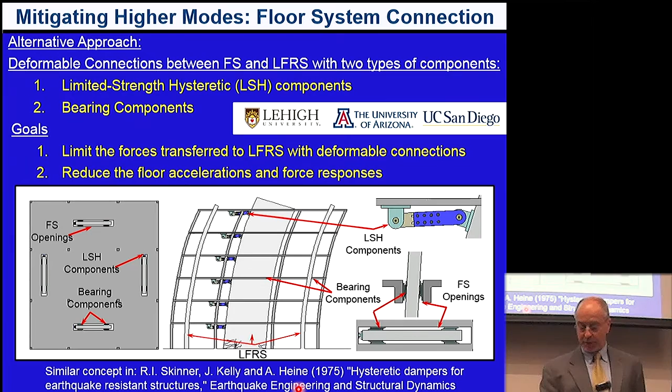There's a structure that we studied about 2.5 years ago at UCSD, and it's a precast rocking wall, shear wall structure. It's half scale, and it was tested on the shake table at UCSD.

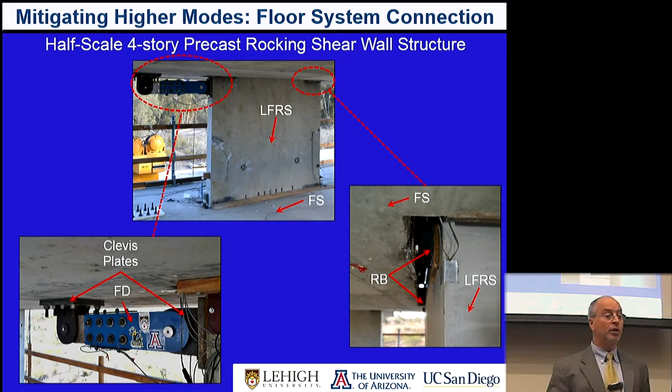We use a friction device as our hysteretic force limiting element, and we use some rubber bearings between the shear wall and the floor system to brace the shear wall out of plane. Here's a video that shows that, and I might play this video twice because I think it's pretty interesting.

There's a friction device doing its job and transmitting forces into the shear wall. You notice the structure has torsional response, and that's intentional. We actually designed the structure in an eccentric way so it would have a torsional response. I'll play that again.

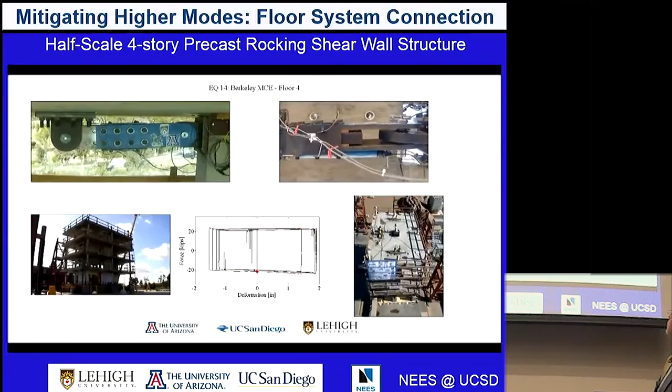The friction devices more or less did what we thought they would do. They transferred a very predictable level of force into the shear wall from the floor system.

We also did some tests at Lehigh on this in a full-scale sense, and it's important to do these things at full scale because the forces do tend to get large. The one we studied there was with a BRB as our force-limiting device, and again with rubber bearings between the shear wall and the floor system.

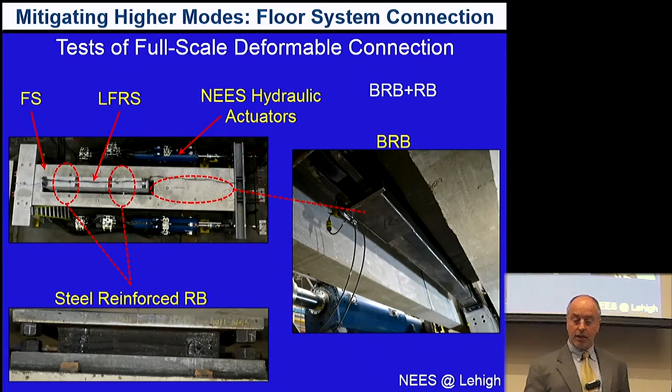I'll show you a video of that, and a couple of videos actually. This is not necessarily so interesting. It shows that the BRB is doing its thing, controlling the force that gets transferred from the floor system into the shear wall.

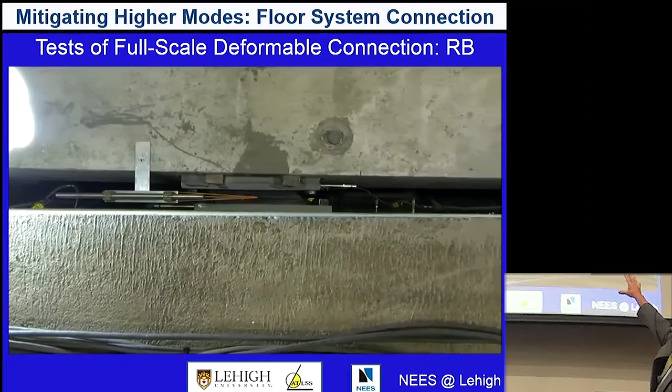The next video shows the rubber bearings doing what they have to do. It shows that we actually push them through a pretty large deformation. This is the top of the shear wall, and that's the floor system right above. We see that the rubber bearing actually has to deform quite a bit in the way we've designed it.

So here's some numerical results, which give us an idea of some of the requirements here. We have a gravity load system in this numerical model. Over here, it's basically a simple frame. We have a shear wall, and we have these deformable connections between them.

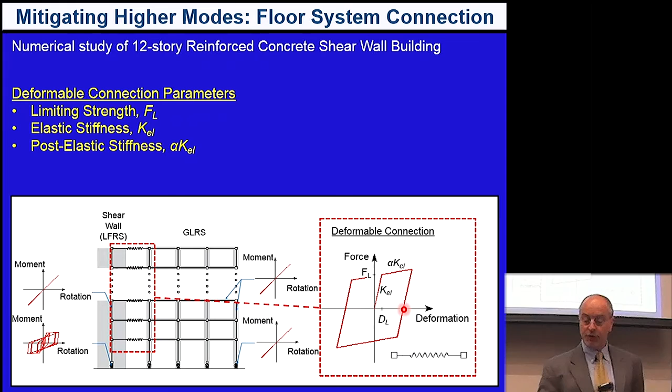In this initial study, we had very simple models: a stiffness, a secondary stiffness, and a capacity FL. We studied this under a set of about 18 ground motions, something like 20-odd ground motions. We initially did a very large parameter study where we varied the force capacity by a factor of 10, varied the stiffness by a factor of 100, and varied the secondary stiffness from 0 to 5%.

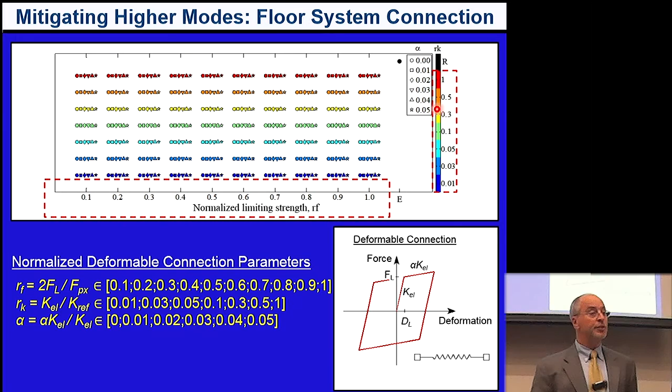And that's what's shown here. We also had in here a rigid elastic case, which is shown way up here just to get it sort of in the high strength, high stiffness case. And that would be like a conventional system.

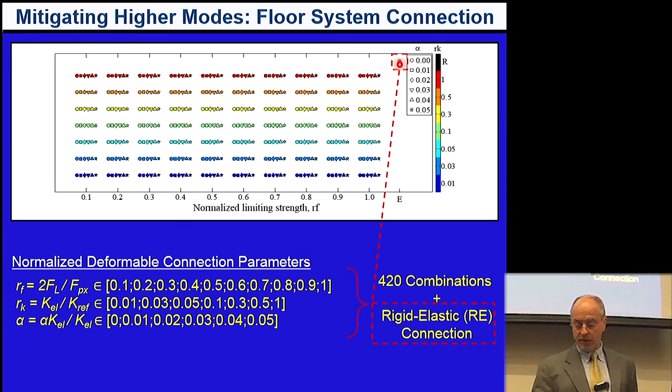This is about a 45% reduction in the mean value of the base shear, and an 85% reduction in the dispersion. So now we've essentially eliminated the uncertainty in how much base shear you need to design for, as well as control it. Effectively, we eliminate the uncertainty in the base shear because we've eliminated the higher mode response, which was really our goal here.

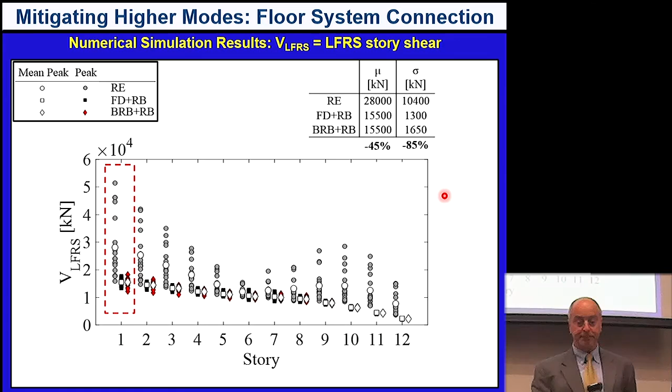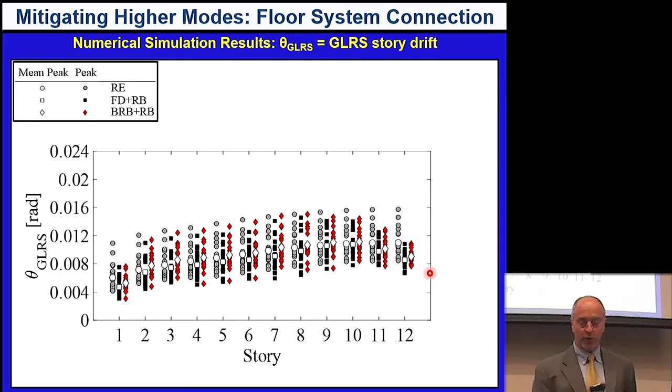So this is also still a work in progress. The experiments we have conducted already in the past show that we can make this thing work, it can be designed and constructed and perform more or less as expected. We limit the forces transferred from the floor system to the lateral force resisting system, which reduces the floor accelerations and the story shears in the lateral force resisting system. More importantly, we really control the dispersion, which means you have a much more reliable result in terms of what you're designing for.

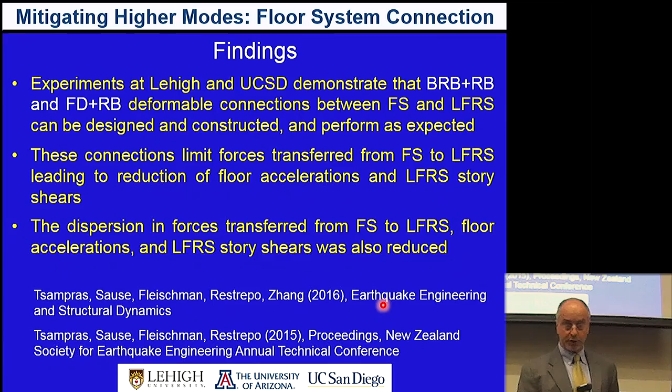And you can find that paper in the proceedings from last year at the New Zealand Society of Earthquake Engineering annual meeting. There's also a kind of advanced version, a better paper I think, in Earthquake Engineering and Structural Dynamics. So here's the conclusions from the whole thing.

What I told Quincy earlier today is I enjoyed trying to knit together results from like 4 or 5 PhDs, which was an interesting challenge for me because I wanted to talk about higher mode response, and I had different people studying it in different ways, and here was a chance to try to pull it together—perhaps not as successfully as I would have hoped, but hopefully close.

The first thing is that these self-centering systems have the potential to survive these earthquakes, either DBE or MCE possibly, without significant structural damage, which at first is a pretty impressive potential. The rocking response is a first mode response, but by controlling the capacity, you can control the first mode response. I don't think that's anything new—that's just a summary of what we learned a while back.

But if you really want to get that kind of potential, you really have to figure out what to do with these higher modes. To get that damage-free response, you're going to have to figure out what to do with these higher mode forces. They showed 3 ways. One way is just to design for elastic response, which means designing for pretty large forces, which have a low probability. You could include a second mechanism to control a second mode response, but then the third mode is still there facing you. Or you could use these deformable connections to limit basically all the forces that get transferred in and really control the higher mode force response directly.